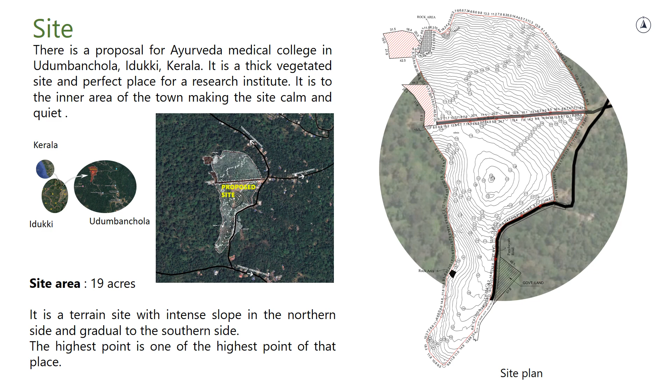About the immediate context, there are very few buildings around. Mainly residential buildings are seen, and this is like one of the nodes in that place. And this site is actually in the inner area of Udumbanchola. So the site is a very calm and quiet place without much disturbance from the public.

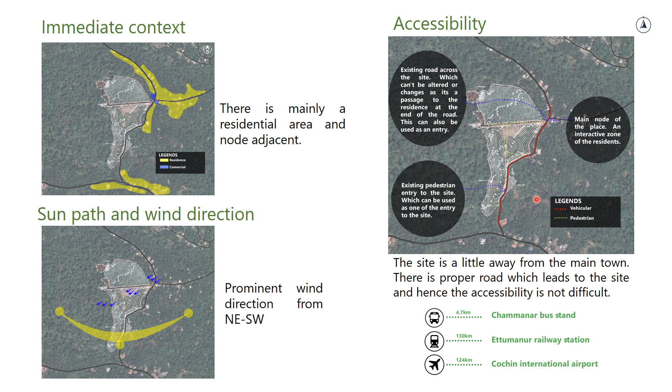And the wind direction is from the northeast side, and it flows from a lower elevation to a higher elevation, and this center part of the site is the highest elevation, which is 125 meters, and the lowest is around 82 meters, which is here, and it slopes down to all four sides from the center. Relief map showing the relief of the site. The center portion is the highest elevation point and slopes down in all four directions.

This is the slope analysis, through which we can analyze that the darker colored area is the steep slope, which is 20% and above, and design considerations need to be taken while designing in these places. And vegetation: the site is almost a thickly vegetated site, having thick vegetation to the northern and southwest side of the site. The center portion has very little vegetation.

And coming to the circulation, there is a main road which passes and a private road passing through the site, splitting the site into two. And currently there is an existing pedestrian path used by the public, and we can use it as a main entry to the site as well. Possible entries: there are two from the main road and also from the node which passes through the private road; that also can be used in the campus.

Talking about the views, there are very few views, and the view is mainly to the thick vegetation. In surface drainage, there are three valley spaces which we can use for the design and other considerations while designing.

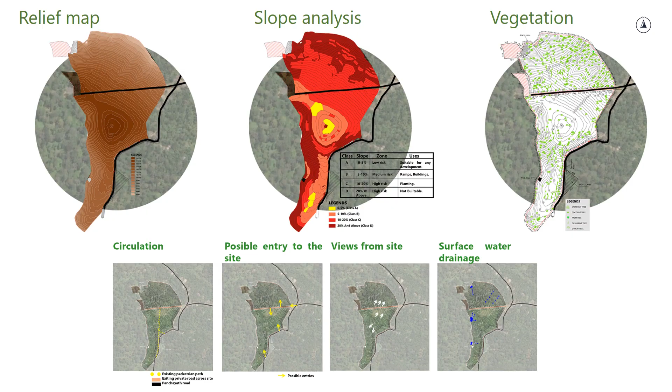Analysis was also done from the site, where the site is in the inner areas of Udumbanchola and a quiet and calm place, making the site very apt for the project. And since it's a contour site, there are many design considerations to be taken, and also cutting down trees can lead to landslides as well. So some considerations have to be taken while designing.

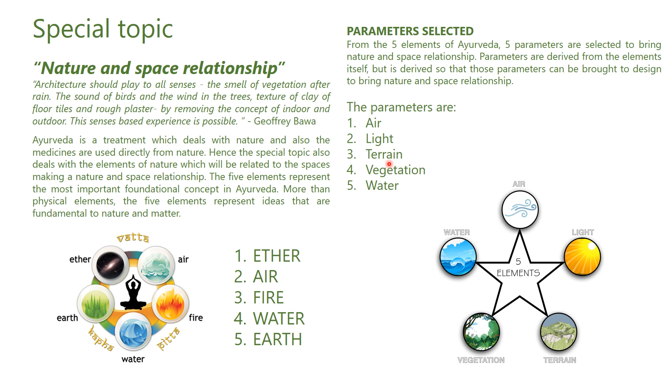My special topic is nature and space relationship, and there are five elements of Ayurveda: ether, air, fire, water, and earth. And from this, I have derived five elements to be considered in my design. So the five parameters are air, light, terrain, vegetation, and water. For each parameter I have selected different case studies, and from that I have derived certain inferences, and these inferences I'll be using during my design strategies and design moves.

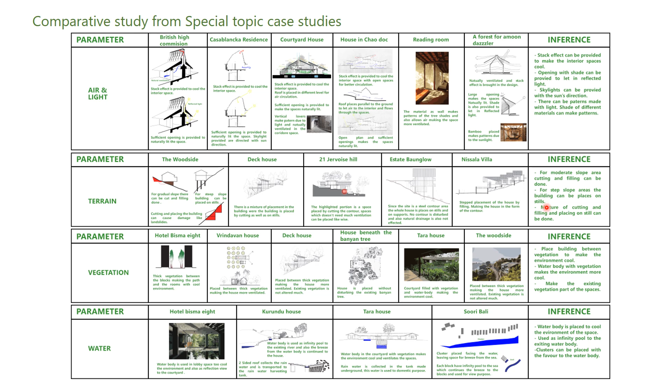As I've mentioned earlier, I'll be using the five parameters in my design. So each move from each parameter has been analyzed. In vegetation, there are thickly vegetated areas and there are buffer areas. So this is one of the moves from the vegetation parameter. And talking about the terrain, the slope areas where I'll be considering building in cut and fill or even stilts, and also the entries for the site.

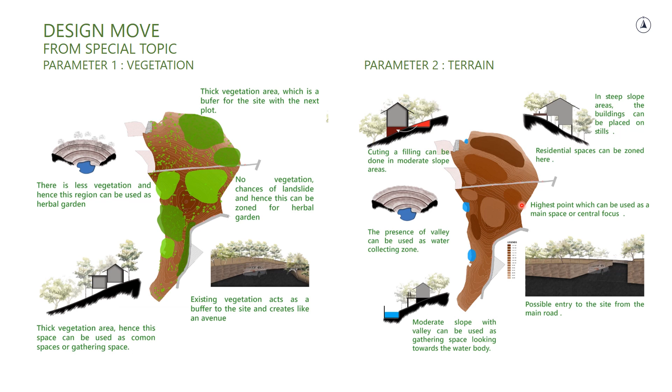Next parameter is water. As I've mentioned earlier, there are three valley points and these can be used as elements in the design. Next is air, where the predominant wind is from the northeast side, and there are some design considerations which can be taken to have proper ventilation throughout the design.

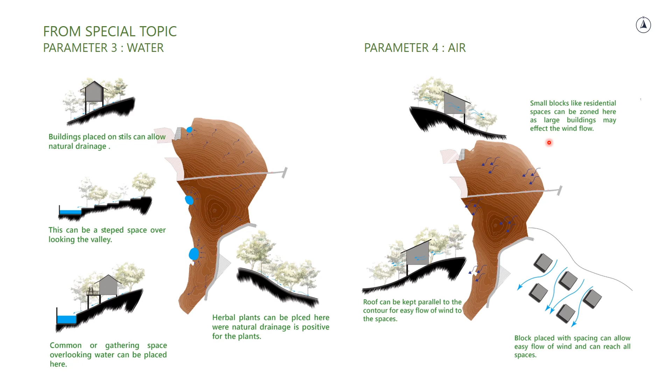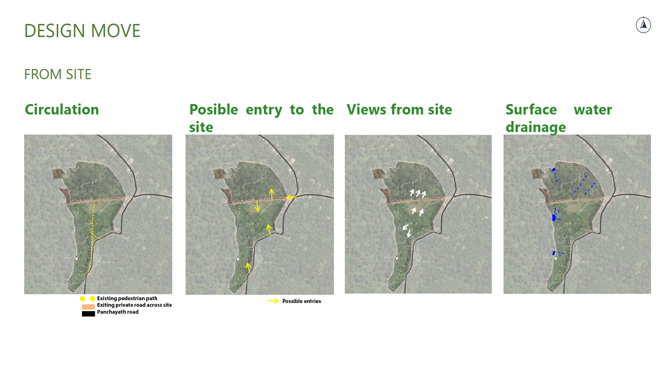Next is from the site, the circulation and the possible entries which I can provide, and the views and the water drainage area. Zoning is derived from site analysis and special topic analysis, having three blocks: public, semi-public and private. Separating the private, there is a private road and this acts as a buffer between these spaces.

And having the entry from here, which leads to a common space and the public space, separating the semi-public space and the other spaces as green and interactive spaces in the site.

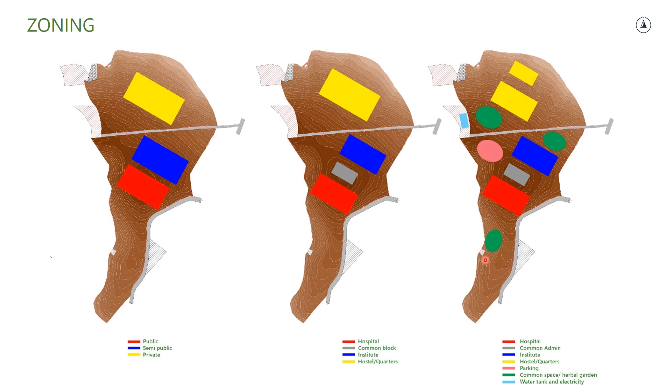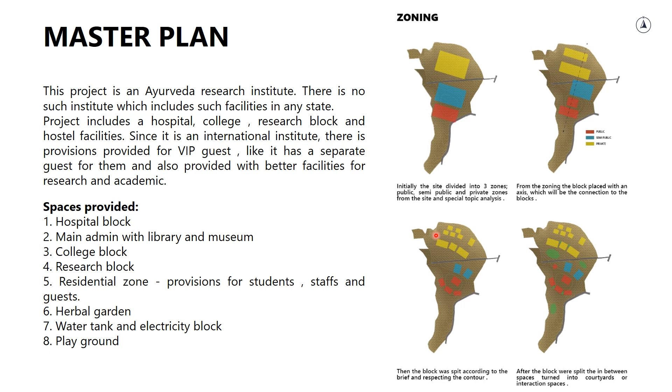Coming to the master plan, there's a hospital block, main admin block, which is the common space, college block, research block, residential zone, herbal garden, water tank and electricity, and playground. And as I have already mentioned, these are derived from the site and special topic analysis and splitting the blocks according to the contour to achieve the master plan.

The master plan and entry to the site is from here. This is the gateway and this road leads to the common space, which is the admin block and hospital. In the admin block there are a museum, library and cafe, and to the rear side of the hospital there is a walkway which leads to the gazebo and water body. These are the renders for it.

To the rear side of the admin block is the college and this is the research block, and the in-between space is the interaction space for the students, which leads to the herbal garden of the college. Here is the canteen and parking space for the campus. This is a private road which leads to the water tank and electricity, and this is the ground. These two are the renders for it.

And another herbal garden which leads to the hostel. This is a hostel block and the center is the common space, and to either side are the boys and girls hostels. This is a road which leads to the guest house and this is a cluster for staff quarters.

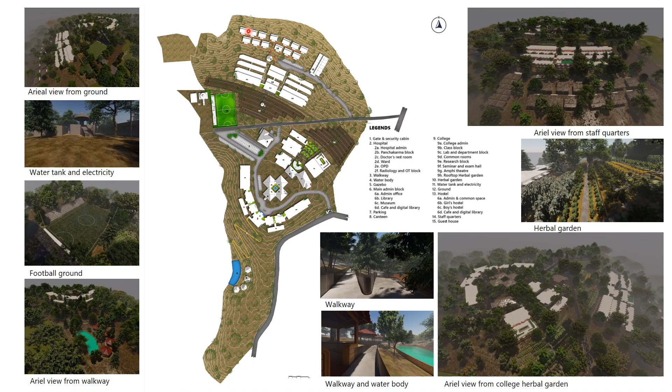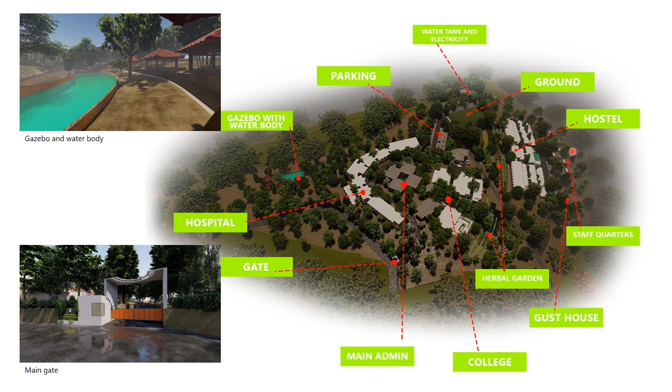This is an overall 3D aerial view of the site. This is the gate, hospital, walkway, gazebo, main admin block, college, herbal garden, hostel, ground, water tank, staff quarters and guest house. On to the detailed plans of each block.

First, the hospital block, which has admin, pharmacy, Panchakarma block, OPD block, ward, radiology, blood bank and operation theatre. Here the zoning is done by having a public space in the center, and on either side are the inpatient and outpatient departments, again split according to the contour, respecting it, with courtyards between each block.

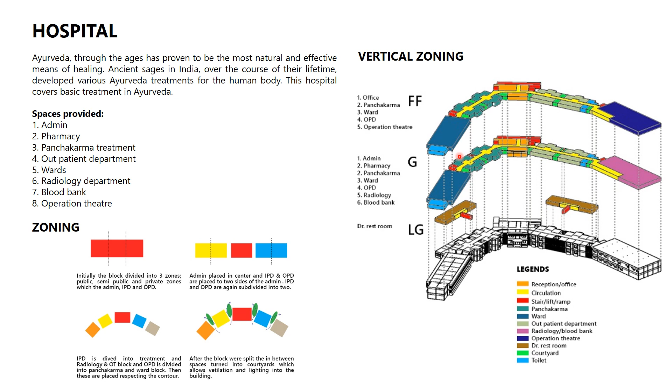This is the overall view of the hospital, having an admin space here, and to the left is the Panchakarma block and ward, and to the right is the outpatient department. Here is the radiology and blood bank, and on the top floor is the operation theatre. And from each outpatient department and Panchakarma there is a doctor and nurse restroom.

Here is a plan of the hospital. We enter from here, into a reception and waiting area, and to this side is the Panchakarma block, which leads to the ward. The lower portion of this floor is dedicated to the ladies, and the upper portion is for the men.

And here is a pharmacy, and to this side is the outpatient department, and it's the same on the first floor as well. And this is the radiology block and blood bank, and on the top floor is the operation theatre. And from each block there is a doctor or nurse restroom for Panchakarma as well as the outpatient department.

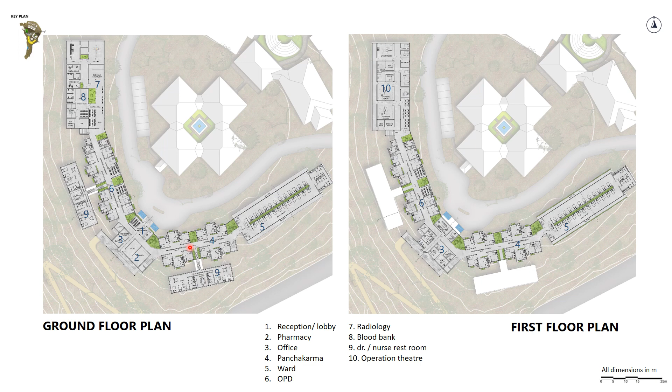Here are the sections. This is a section through the main waiting area, and the conference room is on top of it, and here is the ramp which leads to each floor. And this is a section through the outpatient department, and these are the treatment rooms, and this is the doctor or the nurse restroom. And this is the section through the ward. Here's the ward, and on either side there are balcony spaces.

These are the overall renders: main reception, waiting area. This is the treatment room and waiting area for the outpatient department, having a courtyard in the center. And this is the radiology department, blood bank. This is a panchakarma room, ward nursing station, and this is the ward and the balcony for the ward. This is the nursing restrooms, and this is the dining space, and this is the walkway behind the hospital.

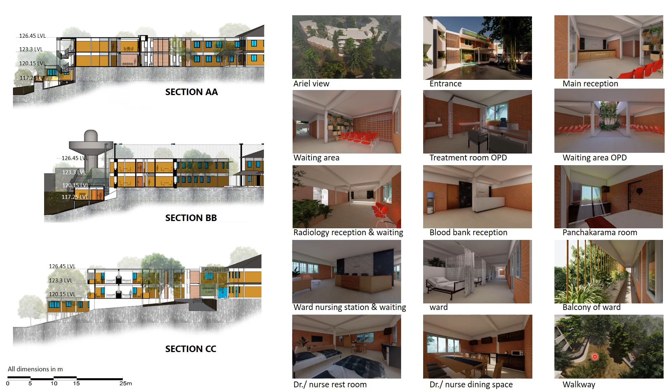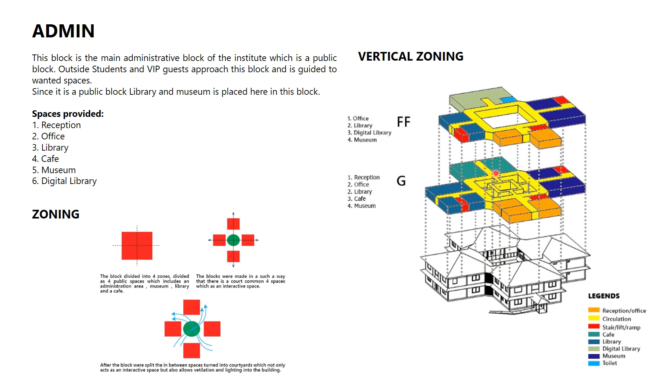This is the admin block, which is divided into 4 zones and a central courtyard, having reception, office, library, cafe, museum, and digital library. This is the overall view of the admin block, which enters to an office space, and this is a large courtyard space. To the left is the library, and on top also is the library. To the right is the museum, as well as on the first floor. And here is the cafe, and on top of it is the digital library.

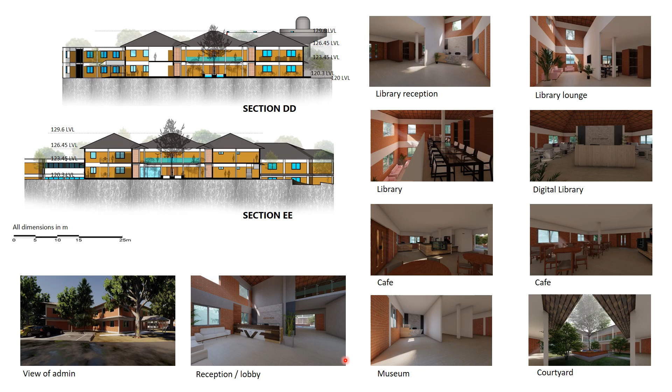the central courtyard. Next is the college, where the college is divided into academic and research blocks, and in the center are the interaction spaces. By splitting the buildings, we can have proper wind circulation and natural ventilation in the building. So here is the overall view of the college. Here is the office space, to the left is the academic block, to the right is the research block. And this block is the exam and seminar hall block.

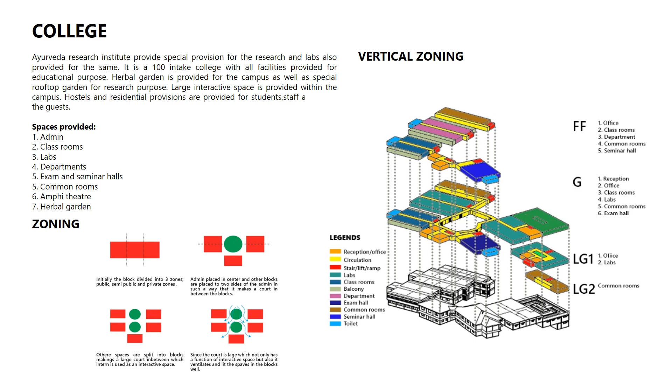This is the classroom with balcony space. This is a lab, and on top of it are the department rooms, and to the rear side of it is the common room, lower floor for the teachers and upper floor for the students. This is the plan, and here's the entry to it, and this is the office, and on the upper floor is office as well. This is the exam hall, and on top of it is the seminar hall, which leads to an open space. It's a gathering space having an amphitheater, and this is the classroom, and there are balconies provided for the classroom, and on top is also the same.

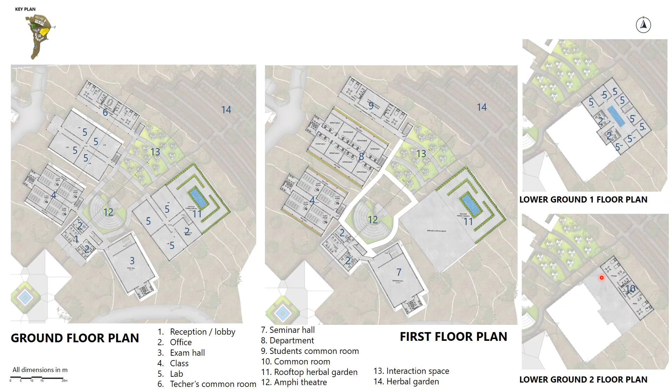Next, leading to the labs, there are 4 labs on the ground floor and 8 department rooms on top of it. This is the common room for the teachers, and on the top floor is for the students. This is the research block. There are 4 labs on the ground floor, and there is an office space, and there is a roof herbal garden as well on that floor. And lower in this block are some labs and offices, and lower to this floor is the common room for the researchers. This is one of the sections through the amphitheater and interaction space. This is the interaction space, this is the amphitheater, and this is the admin block of the college.

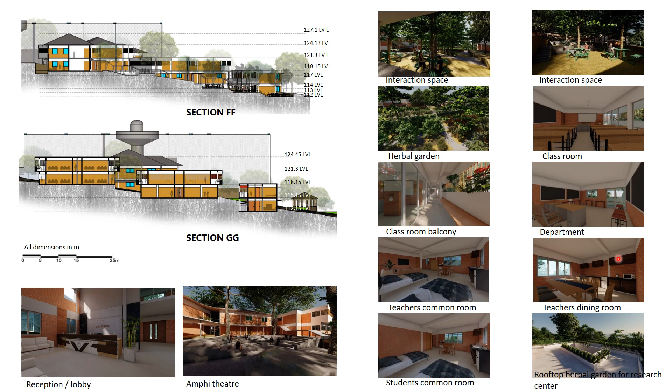Next is the section through the academic block. These are 4 classrooms, and on either side are the balconies. On this floor there are labs, and on top of it there are departments with a balcony. And this is the common room block, lower for the teachers and upper for the students. This is the reception lobby, amphitheater, and the interaction spaces. This is a classroom and the balcony for the classroom, department room, common room for teachers, and this is the dining space for them, and the students' common room and rooftop herbal garden for the research block.

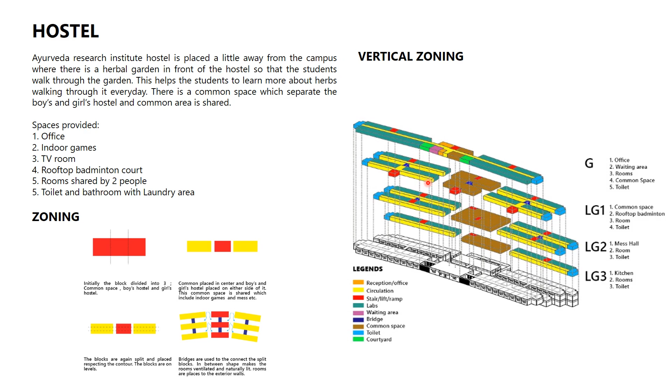Next is the hostel. The hostel is again divided into 3: a central space as a common space, with girls' and boys' hostels on either side. This common space is common for both of them, and there are recreation spaces, a mess hall and kitchen space in this center zone, and there is a central corridor which leads to the toilets and washrooms for the hostel rooms. This is the plan.

Entering to a lobby space having a reception area. This is the center common space, and to the left and right are the hostel rooms for the girls and boys. This again, to the lower floor of it is the interaction spaces in the center and having a rooftop badminton court, and on either sides again is the rooms.

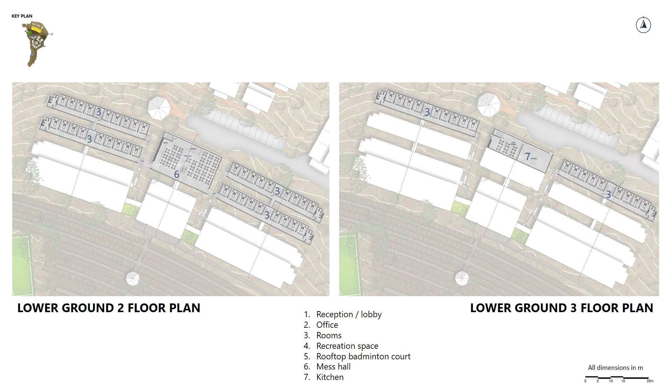To the lower floor of it, in the center part is the mess hall, and on either sides are the rooms, and to the lower of it is the kitchen space and small dining space, and again rooms on either side. This is section through the common space, having a main lobby here, and this is the interaction space, and this is the mess hall, and this is the kitchen space.

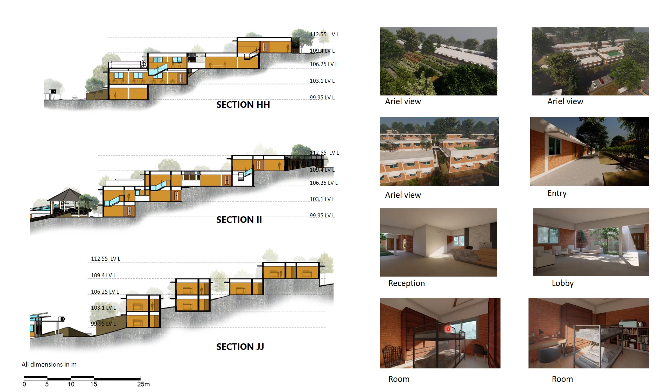This is a section through the bridge which connects each block, and this is the section through the rooms. These are some views, and this is the herbal garden which is in front of the hostel. These are some views. This is a reception lobby space, and this is how the room looks like, shared by two people. Next is the canteen.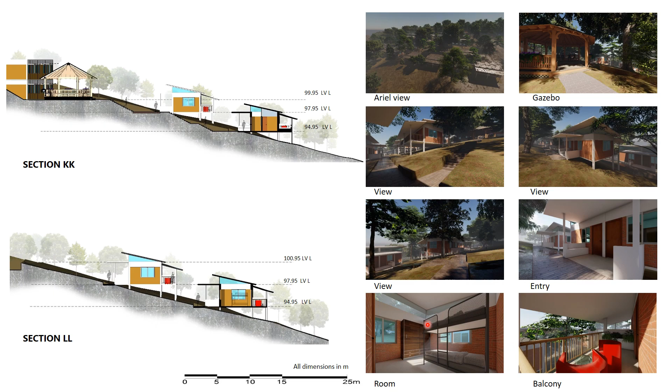This is the guest house. This is also situated in a steep slope area, so the guest house is kept on levels, and this staircase leads to each room on either sides, and also having a balcony space, and the reception is included with a small cafe space. These are 2 sections, and this is the view.

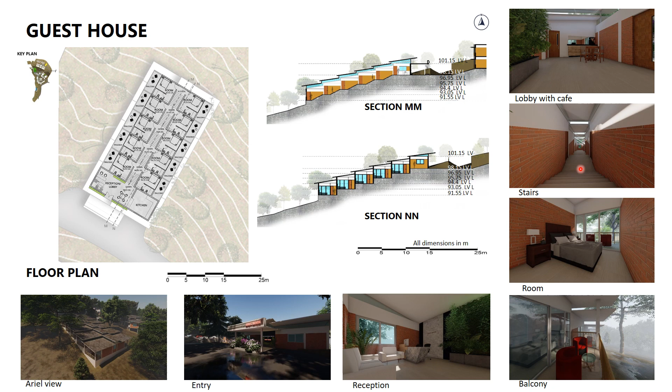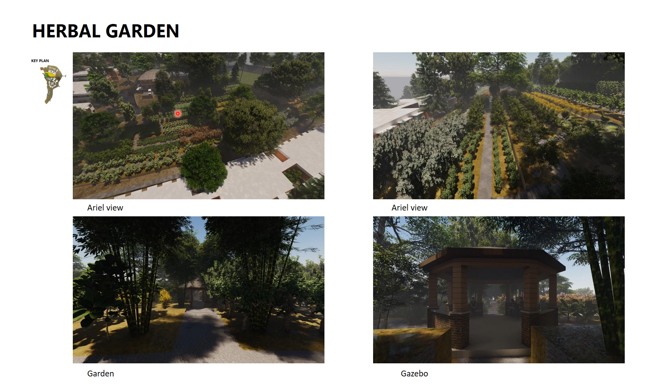This is the main entry of the guest house. It's a reception lobby with a cafe. The staircase also has a corridor, and this is a room and balcony. Next is the herbal garden, which is present in front of the hostel, and students walk through this herbal garden, which leads to the hostel.

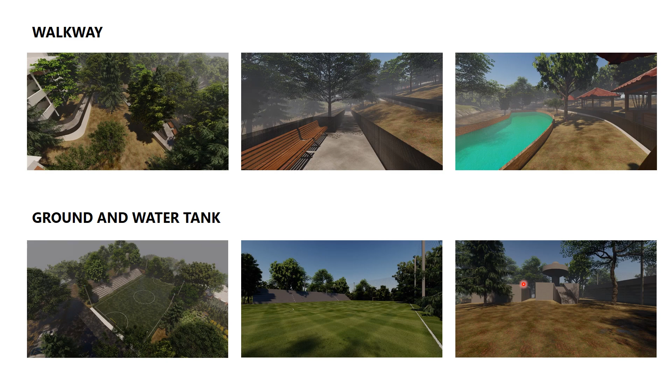This is a walkway which is rear to the hospital block. This leads to a place with gazebo and a small water body. Here's a ground and water tank of the campus. Next, talking about the services, this is a map showing the septic tank, power plant, and water tank, and water supply, sewage line, and electric lines.

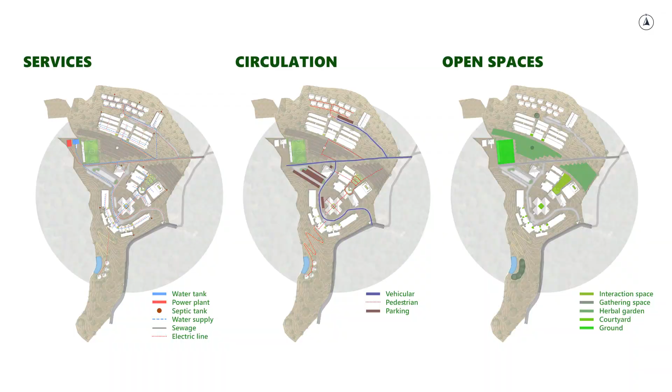This is a table showing the application of special topic in master plan, module, and unit level. As I've said in the earlier slides, I've used these 5 parameters to design, and this is how I did it. And to end up my presentation, I would like to show a small walkthrough to my campus.

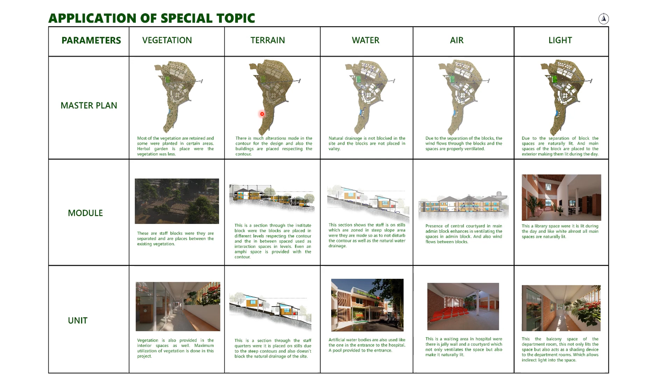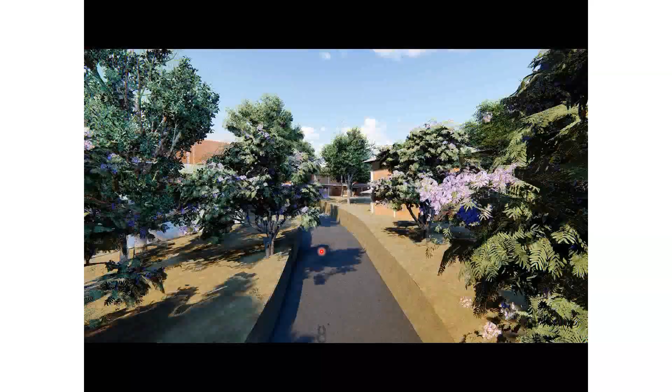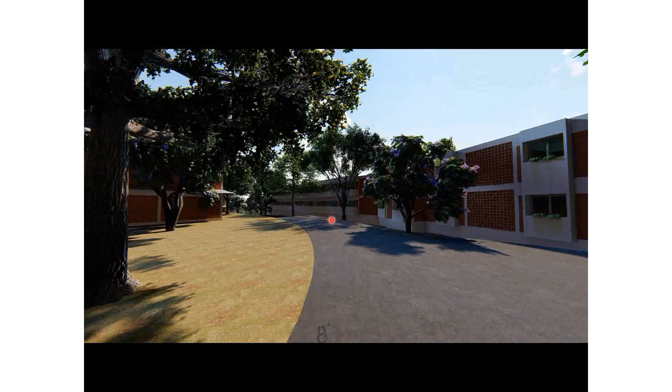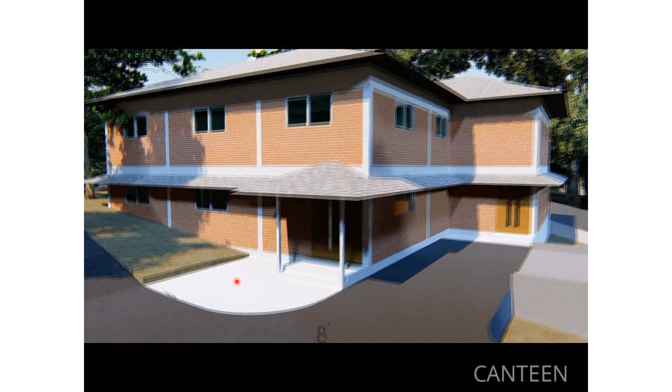This is the main entry of the college, a gateway, which leads to the hospital and admin block. This is the walkway rear to the side of the hospital, which leads to the gazebo and water body. This is the parking space of the campus. This is a canteen. This is the admin block.

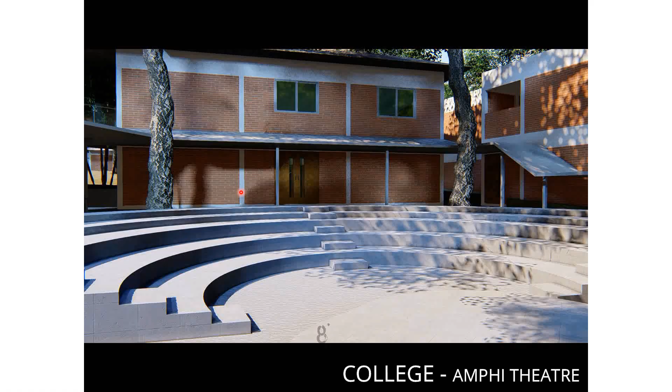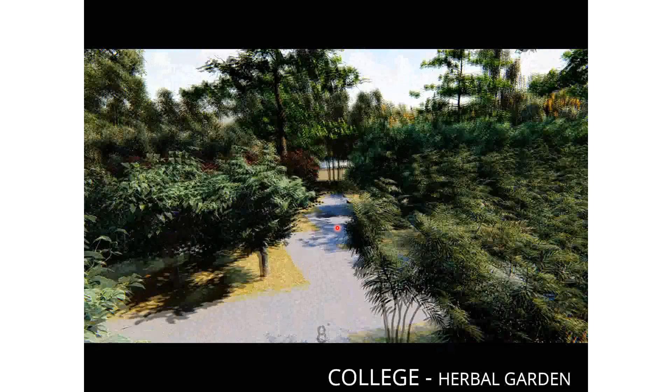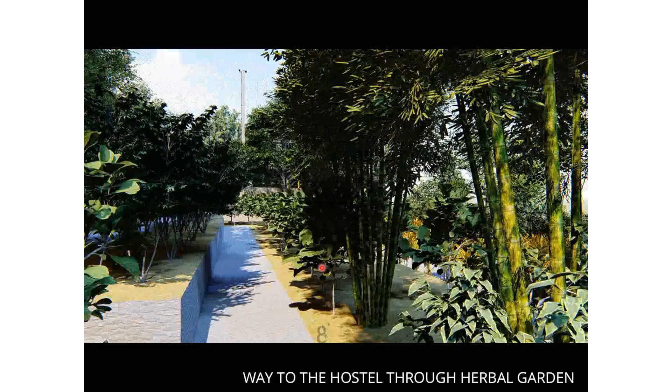And from the admin we go to the college campus, and this is the amphitheater and rest of the courtyard space as interaction space for the students, which leads to the herbal garden of the college. This is the overall view of the herbal garden rear to the college, and this is the way to the hostel through the herbal garden, and a gazebo space as a gathering space in between the herbal garden.

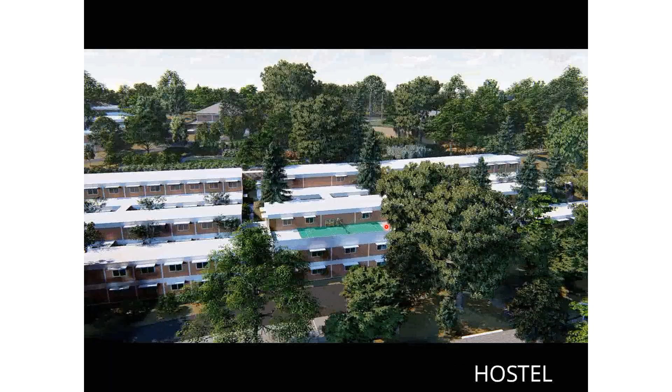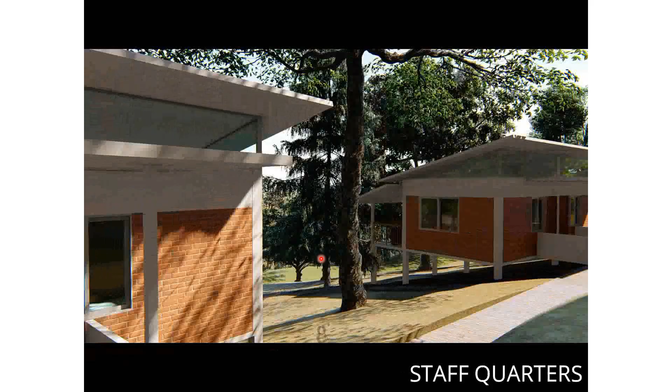And this is the hostel entry. This is the aerial view of the hostel, and then this is the way to the staff quarters, and again a gazebo. These are the staff quarter clusters. This is the guest house. It's the ground.